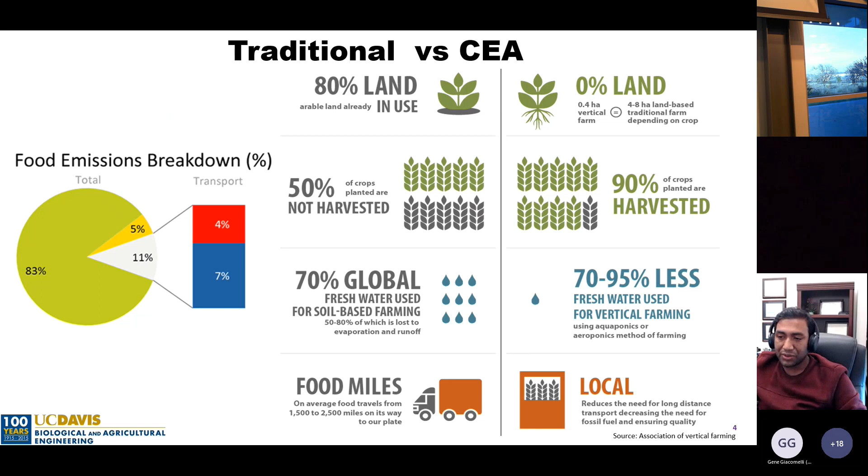Okay, so we already talked about lots of different benefits, why we need controlled environment ag, and the expansion of the industry. But we have some challenges. Some of you already mentioned there are big challenges in controlled environment ag. So this is one report I found from a group, called the Controlled Environment Agriculture Census Report. They collected this data from 300 commercial growers in different countries, and this shows, for different types of controlled environment ag facilities, how they are making money.

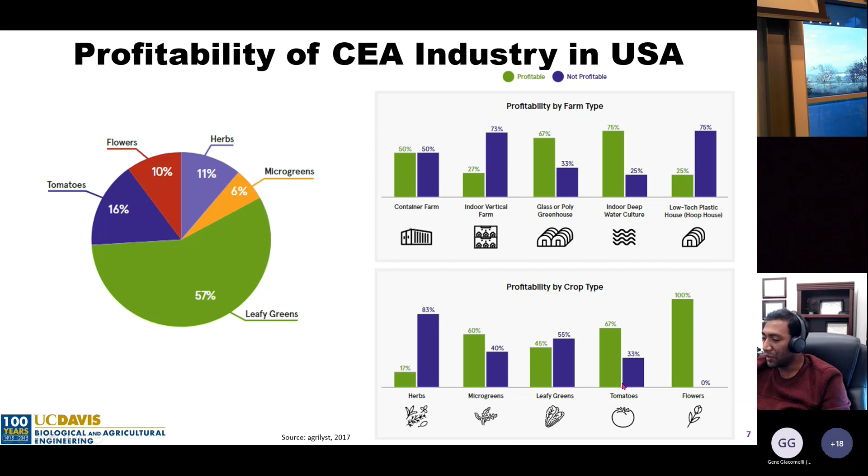That means we have some big challenges. So I just tried to summarize these challenges. The most important issue is the capital investment and the higher energy demand. And also this technology is not brand new. There have been different studies and development, but there is still limited technological support for controlled environment ag.

So we definitely know we can grow any type of plant in controlled environment ag, but from an economical point of view, we cannot grow all different things so far based on the current economic market. That means there are limited types of plants we can grow. Sometimes some people also have a wrong perception in terms of nutritional quality, whether they prefer the open field crop or the crops grown under an artificial lighting system.

And also there are lots of people doing business, but they need a good economic business model to know how much profit they can make based on the system they're designing or operating. So in that aspect, the major costs are the capital, the labor, as well as the environmental or pest control.

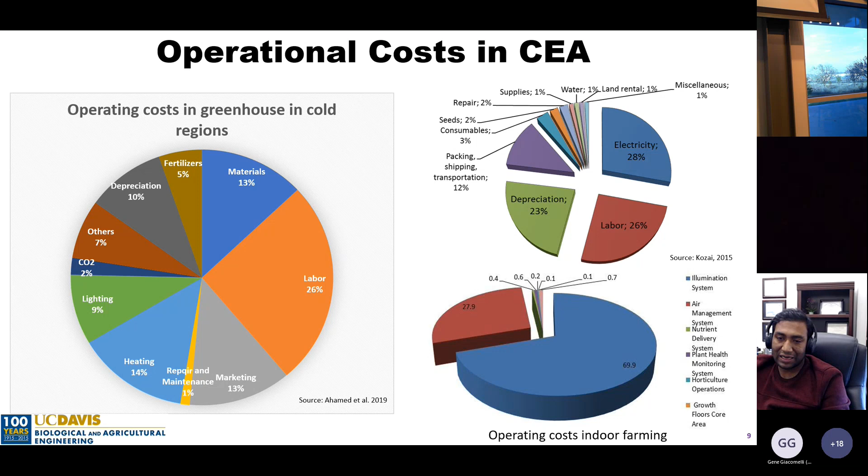And this is a study article I recently read. They studied three different types of controlled environment ag: the low-tech greenhouse without any supplemental lighting, the high-tech greenhouse, and plant factories, for three different locations: UAE, Netherlands, and Sweden. They looked at the different components of energy use for the three facilities in three locations, and presented the data in terms of megajoule per square meter as well as megajoule per kg of production.

So you can see the plant factory basically doesn't need any heating, because the supplemental lighting can provide enough if they need any heating. For the plant factory, most of the energy is required for cooling, dehumidification, as well as cooling of the LEDs. And in UAE, even the greenhouse doesn't need any energy for heating. Mostly they need cooling and dehumidification.

So based on that, we can see energy is one of the biggest concerns for these controlled environment agriculture facilities. And from that aspect, my lab at UC Davis mostly focuses on how we can reduce the energy requirement for these controlled environment facilities, as well as how we can make this system more sustainable.

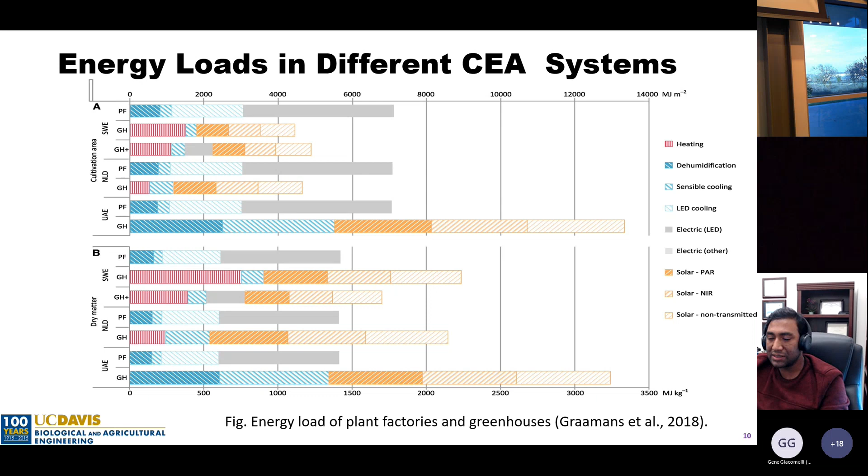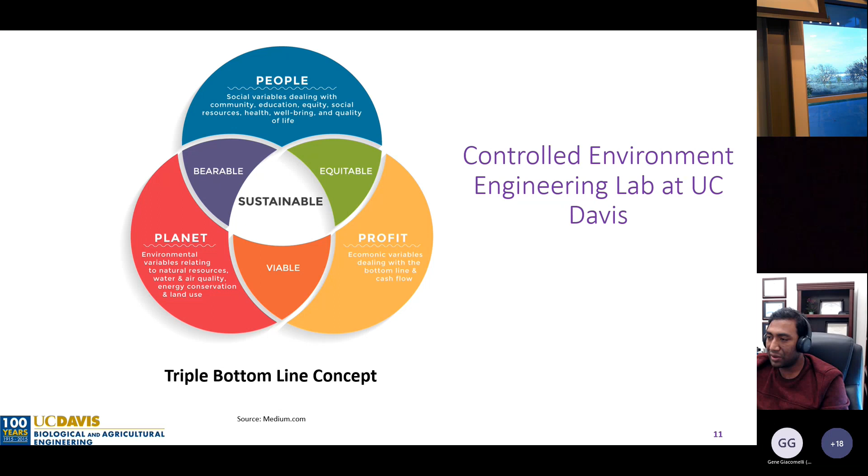So in that aspect, my lab is focused on the three different aspects of sustainability. This is called the triple bottom line: the planet, profit, and people. Based on that concept, my major goal is how we can achieve the net zero energy status for controlled environment agricultural facilities. If you don't have an idea about net zero, it's basically based on an annual basis calculation. How much energy you require for these facilities, and if we can produce the same amount of energy on-site, or get renewable energy from other sources, if that is in balance, then you can claim that your facility is net zero.

And this is very popular for buildings, like commercial and residential buildings. Just after finishing my PhD, I worked in the HVAC industry, as well as a postdoc, on commercial and residential buildings. And they're very advanced in achieving the net zero energy status. I think controlled environment agriculture facilities are becoming more energy intensive, and this will be the biggest challenge to achieve net zero energy status. If we can achieve that, we can get close to the sustainability of this production system.

So how can we achieve the net zero energy status? The most important thing, we have to improve the energy efficiency. We have to design an efficient building envelope. We have to choose construction materials that are more efficient to minimize the energy transfer. As well, we have to focus on renewable energy use, either on-site or off-site, focusing on solar, wind, as well as other sources.

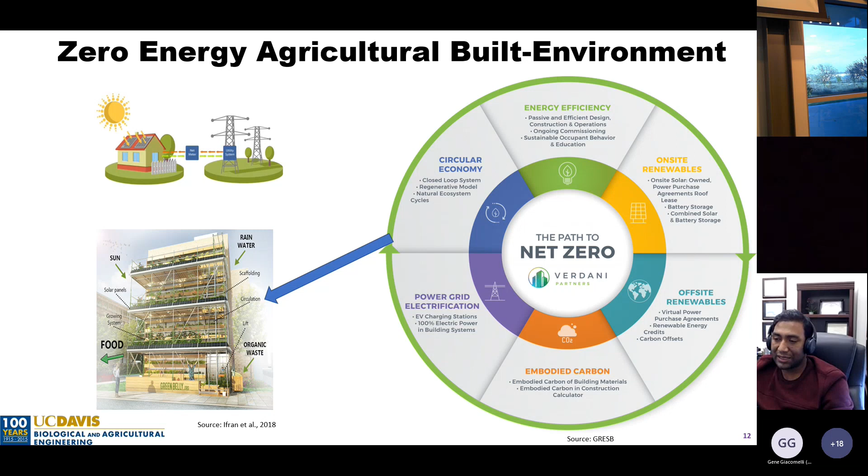At the same time, another important aspect could be the focus on the circular economy. That means how we can efficiently use the waste resources from these controlled environment facilities for producing fertilizer as well as energy production. This could be one concept: if we can harvest rainwater, and use the biomass from the production facilities for organic waste production as well as biogas production, that could be used in the facilities, and thereby we can reduce the impact of this production facility.

Now I will talk a little bit about the research I have done so far. I classified my research in two different aspects based on my previous experience. For my PhD, I focused on two different types of greenhouse, the conventional greenhouse as well as the Chinese style solar greenhouse. I worked on thermal environment models. I developed two different energy simulation models for the conventional greenhouse and the Chinese style greenhouse. Based on the developed models, I did some optimization as well as some energy analysis. I will just quickly present that.

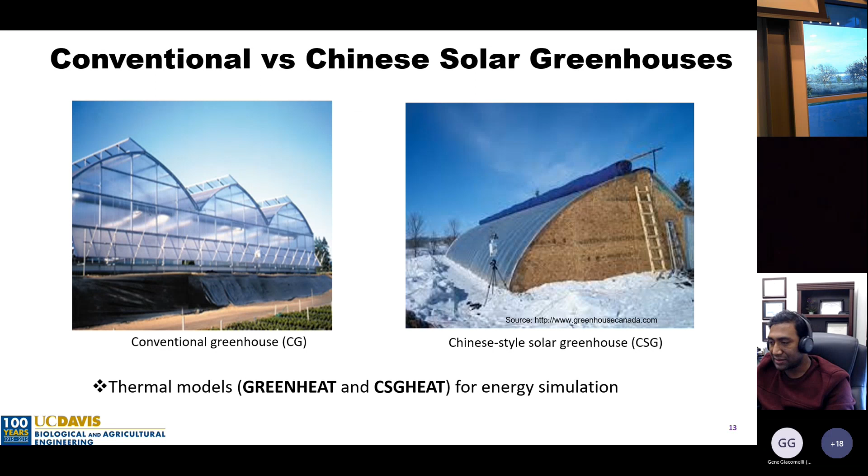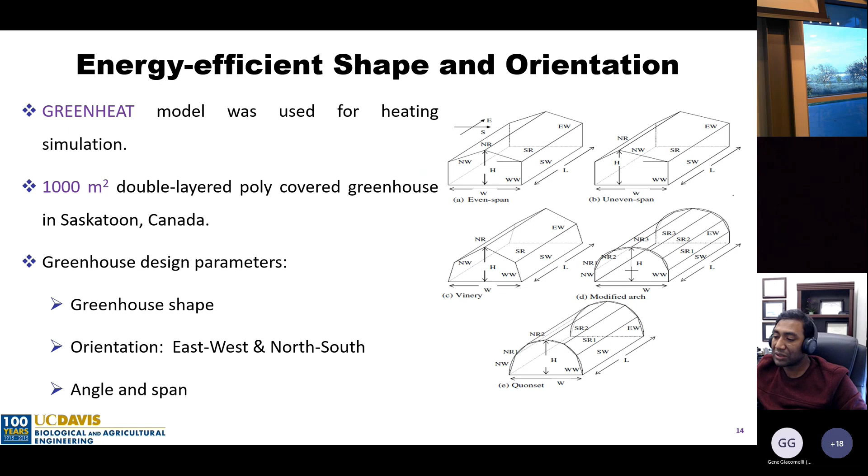So this is one of my results from my PhD. We tried to do some analysis: what could be the efficient shape and orientation? There are a large number of studies already for different locations, and most of them conclude that shape and orientation could be significantly different in different locations. So in Saskatchewan, Canada, we tried to do that optimization because there were no studies in Canada in terms of shape and orientation. We focused on the greenhouse shape and orientation, north-south and east-west, and also the angle and the span.

The reason is that this is an extremely cold region, and if we have a long surface exposed to the outside, the solar gain definitely will be higher. At the same time, the heat loss from the indoor will also be higher. That's why this difference is not that significant. Now, in terms of orientation, we also focused on 2 different types of greenhouse, the single span and the multi-span greenhouse.

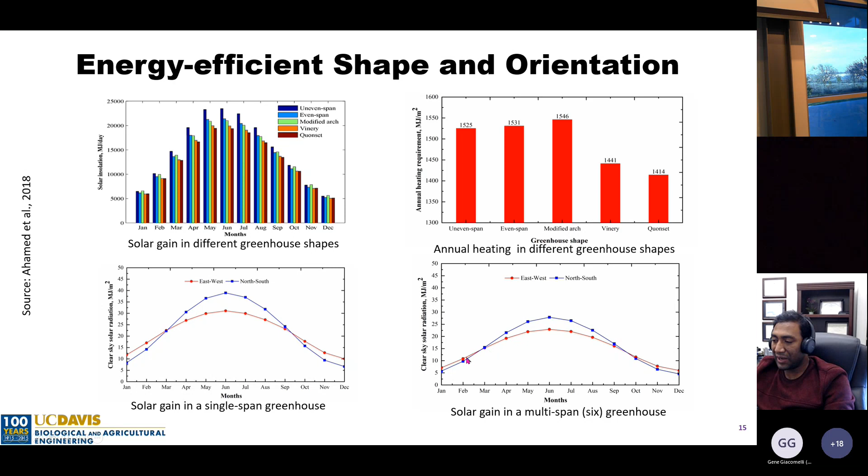Then we tried to see what will be the impact if we just increase the span, from 8 meters to 16 meters, for single span and multi-span. And we can see for the single span, if we increase the span width, we get definitely less solar radiation, because if we increase the span, the surface area exposed to the outside will be less. But the result is totally opposite for the heating requirement. So for the single span, if we increase the span, we can minimize the surface area exposed to the outside, and that way we can minimize the total heating requirement.

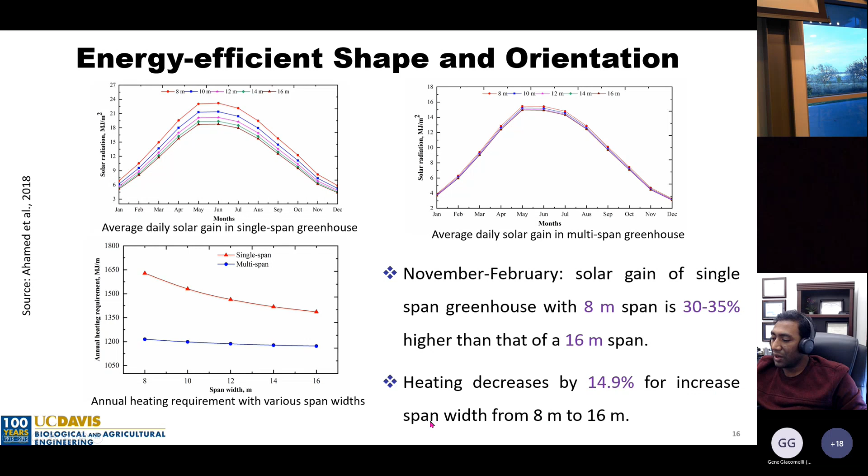So that means if we increase the span from 8 meters to 16 meters, solar gain could be 30 to 35% lower. But at the same time, the heating requirement can decrease by 15% if we increase the span width from 8 meters to 16.

Then very recently, I had an undergraduate group at UC Davis, and I tried to expand that research from my PhD. So we added one different shape, the Chinese style shape, and we did some analysis for 3 different locations in California. So what could be the difference if we do that analysis? We chose 3 different locations: Bridgeport, Santa Rosa, as well as Imperial. Bridgeport is a little bit cold, Santa Rosa is mild, and Imperial is the hot region.

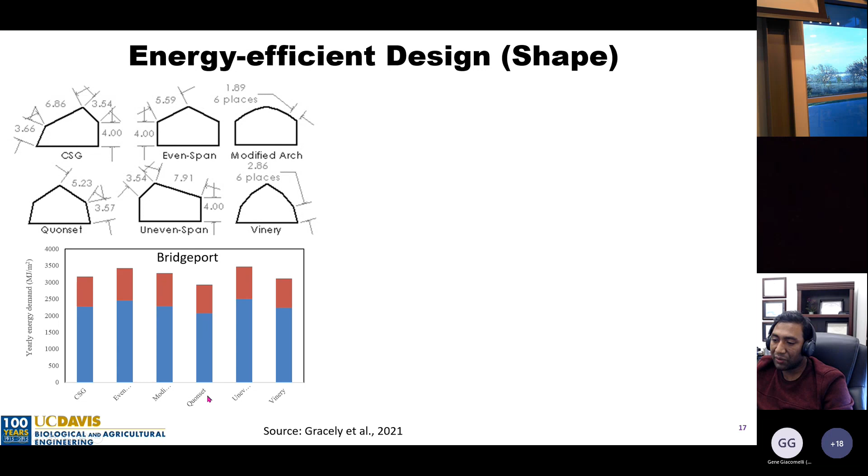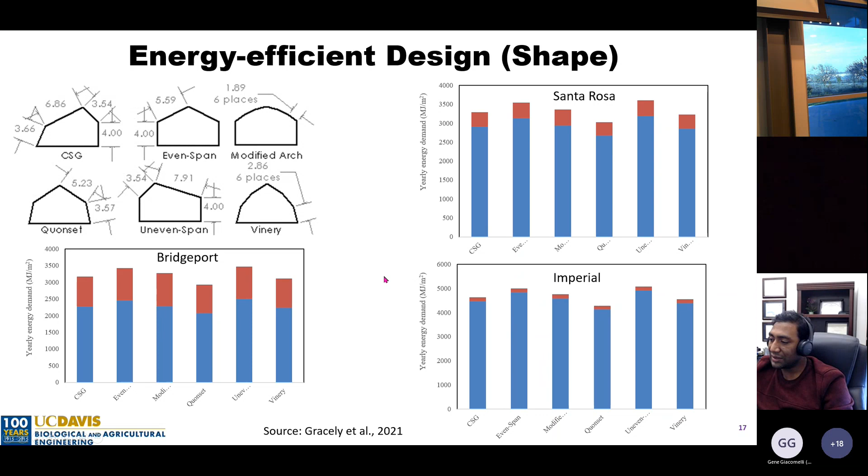So in Bridgeport, you can see the majority of the energy is required for the cooling, and a significant portion of the energy is required for heating. And in that case, the Quonset is the lowest energy required. For Santa Rosa, it's a little bit warm, so the cooling cost increases significantly, but the heating cost also decreases because this is a relatively warm climate. And for Imperial, the energy is mostly required for cooling and a very small amount of energy is required for heating.

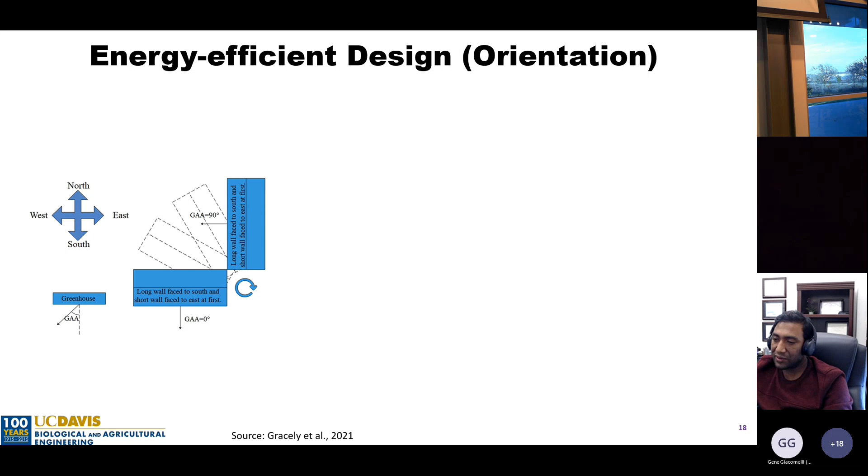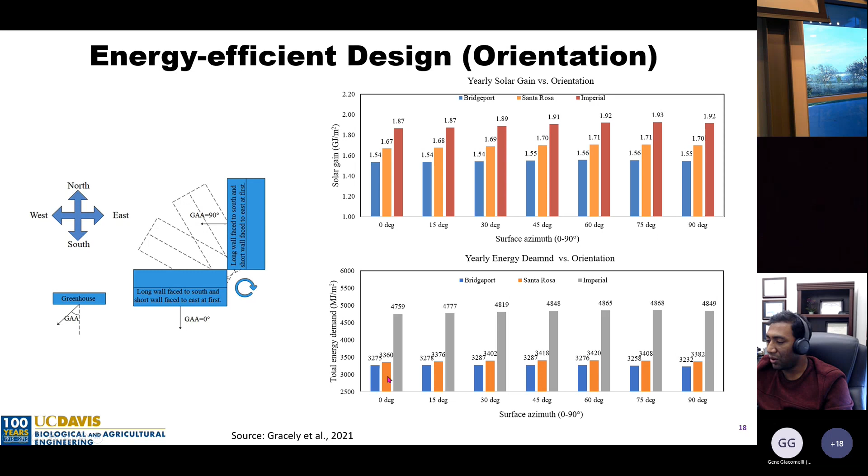Then we also tried to see the impact of the orientation. So we changed the orientation from 0° south facing up to 90° with 15° intervals. This is the result from 0° south facing to 90°. So you can see for all three locations in California, there is not that much significance to the solar gain. There is some change, but it's not a big difference. The same thing for the total energy requirement. So we can say the orientation has very small significance.

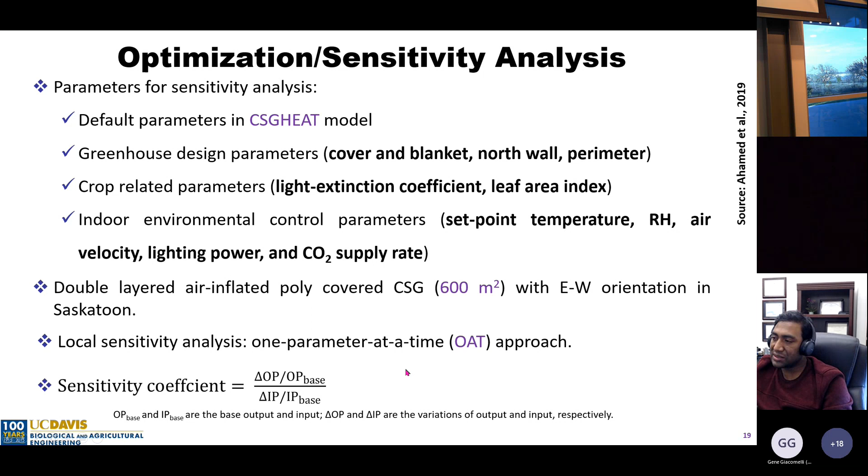Now I will talk a little bit about the optimization work that I did for my PhD. I will show the result for the Chinese style solar greenhouse. Chinese style solar greenhouses have minimum transparent surface, and they have some components that are close to a building. So we chose different parameters: the construction parameters, crop related parameters, as well as the indoor environmental control parameters. For this analysis, we consider a 600 square meter east-west oriented greenhouse in Saskatoon. We used the local sensitivity analysis approach, and quantified the parameters with the sensitivity coefficient. Now I'm showing only very selected results because of the time limitation.

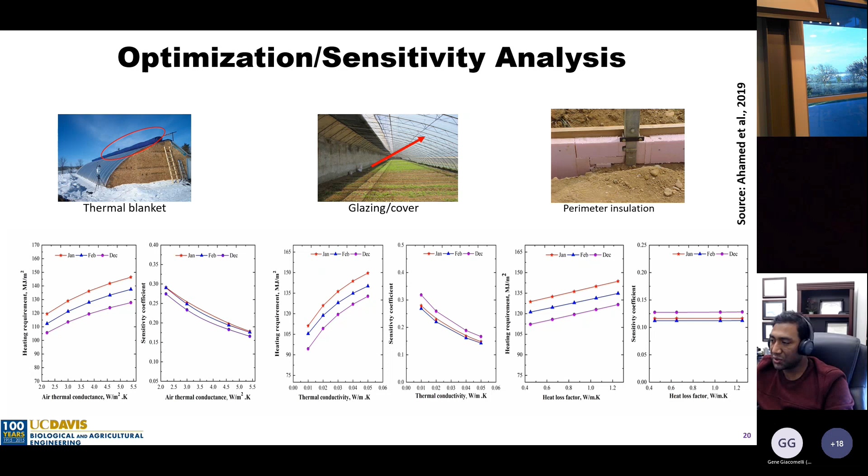This finishes my presentation, and I would appreciate it if you have any questions, we have some time. Thank you.

Thank you, Dr. Ahamed. If you can, stop sharing your screen and